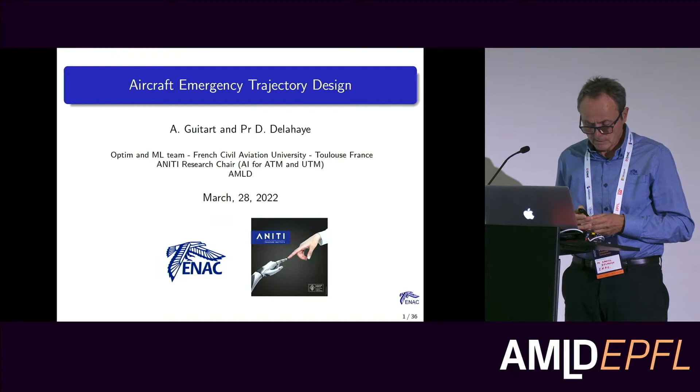So what we would like to address today with you... we started working on this problem quite a long time ago in order to bring a decision support tool to the pilot, in this case, in case of emergency. So I will give just a brief agenda of this talk. I will present the objective of this work. My student, Andrea, will present the resolution algorithms and some results we have developed in this research. And we will address conclusion and perspective.

One thing we have to mention, sorry, I have to be close to the mic.

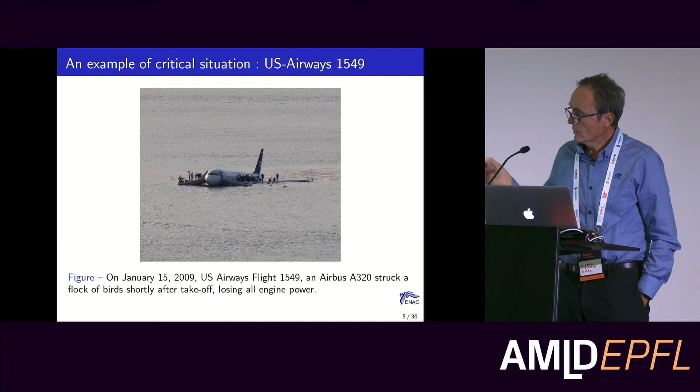You remember this crash in 2009. It is a very famous event because there is a happy end. Due to bird strikes, the aircraft lost both engines. You know this story. And in fact, the aircraft, just a minute, I try to see if I can, yes, here. So it took off from LaGuardia, the bird strike was here, and as you know, the aircraft glided to the Hudson River. But if you see the timestamps here, at that time, about 15:27, and they reached the water at 15:31. So roughly we have 3 minutes gliding.

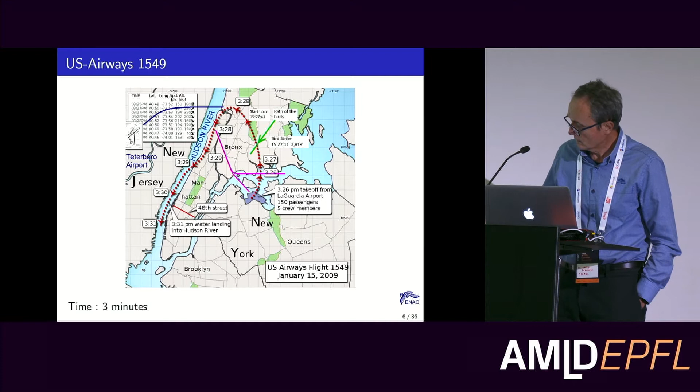So in this case, we were working on this crash with Georgia Tech with Panos Tsiotras in 2009. The idea was already to propose alternates to the pilot in case of emergency. The pilot could say, I accept or refuse, but the system is able to propose something. So that is the real purpose of this work. This one is the most critical one because you are close to the ground and you have very short time for proposing something to the pilot.

I give you also two other cases. The Air Transat flight 236 in 2001, Toronto-Lisbon. Due to a fuel leak, the aircraft ran out of fuel, so it glided for 120 kilometers, 21 minutes, so it was much higher, before reaching the Azores island. This one also, we were working on this crash with Georgia Tech: the Swissair flight from JFK to Geneva, due to fire on board in 1998. The pilot was unable to reach Halifax. But in this case, you have 14 minutes from the event to the ground.

Just to remember, over 70% of fatal aviation accidents are in the takeoff and landing phase because you are close to the terrain. In some areas where you have mountains, it is even more critical. You have to take into account weather. So thunderstorms, for instance: when you have an event like the previous one, you have to be able to reach the ground, avoiding the mountain and also avoiding the weather.

And you have to take into account the wind, because depending on the direction of the wind and the direction of your heading and the landing site you select, you may be able to reach or not this landing site.

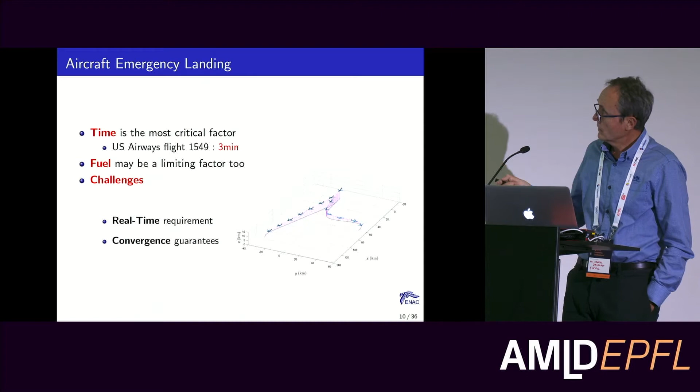You are an aircraft here, you have different landing sites, which are proposed by another algorithm in the project, and we have to produce safe trajectories to bring back the aircraft to the ground safely. We can address that with a classical optimal control approach, but in this case it is too long. The right approach is to produce these trajectories in two phases.

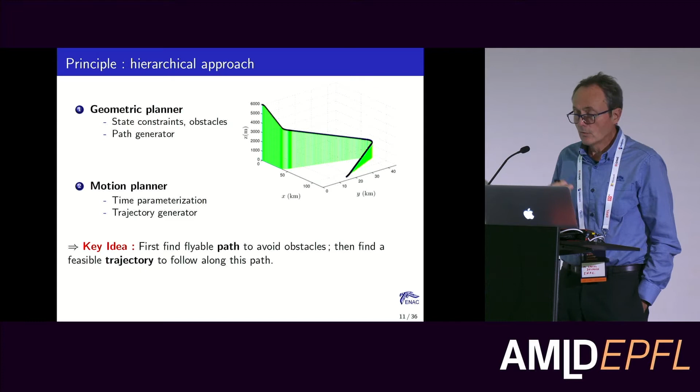The first phase is what we call the geometric planner, which is what we have mainly designed. So we try to design the 3D path. When you have designed this 3D path, you do the time parameterization, which is called the motion planner. Doing that in two phases is much more efficient in terms of computation. So the key idea is first find a flyable path to avoid obstacles, weather, and things like that. Then find the flyable trajectories with the time to follow along this path.

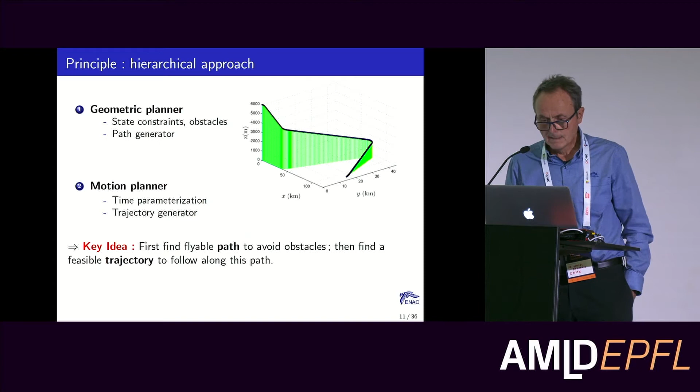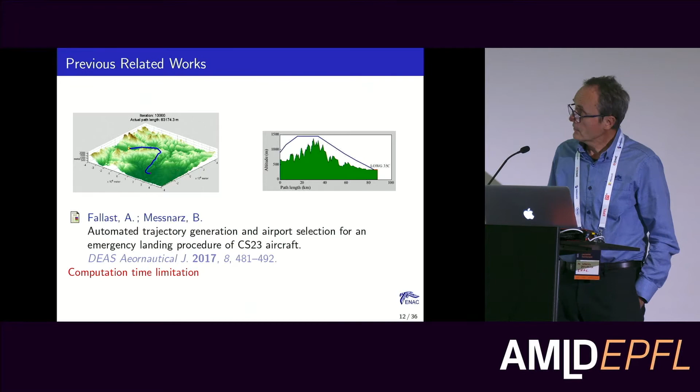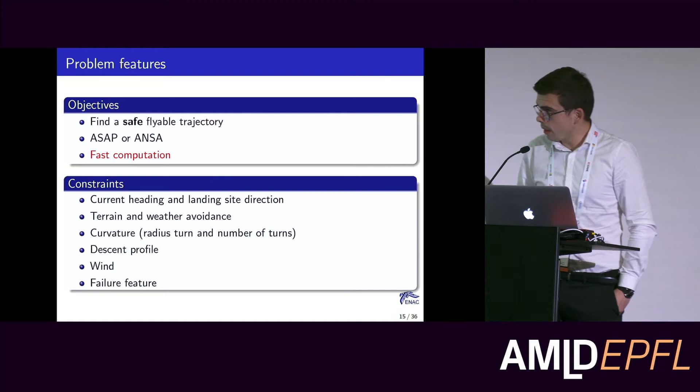Depending on the type of emergency, the curvature and the descent profile can be very different. For example, in case of dual engine failure, the aircraft has to descend to keep a sufficient speed to avoid stalling. So we have to take into account the descent profile and the curvature, mainly defined by the turn radius and the number of turns. And the final constraint is the wind, so we have to take this into account.

So we want to have a very efficient algorithm to generate the trajectories. We decided to use the algorithm called Rapidly Exploring Random Tree. It is a sampling-based path planning algorithm.

At each iteration, a new random point is generated in the space, and if a connection is possible, you create an edge. A connection is possible if there is no obstacle between the two points. At the end, you can connect the final point, for us the landing site, to the graph and generate the path. The main problem of this type of algorithm is that the computed path is not flyable, because you can create discontinuities of heading.

To solve this problem, we decided to connect each point by a single turn curve composed of a first turn to the right or to the left, and then a straight line. Phi is the angle of turn, and L the length of the straight line.

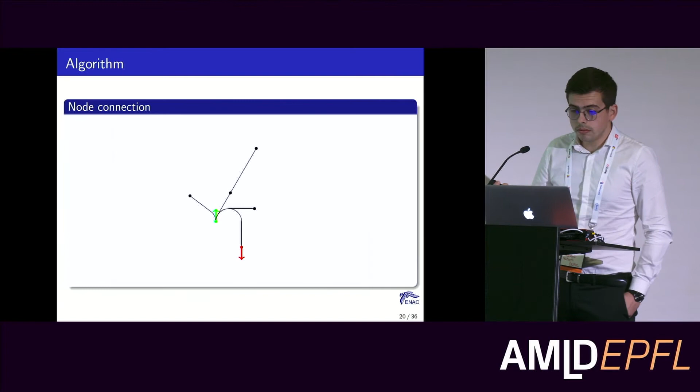We repeat this procedure for each iteration, and at the end, we have a graph of curves. Finally, we can connect the final approach point to the graph, and we have the trajectory.

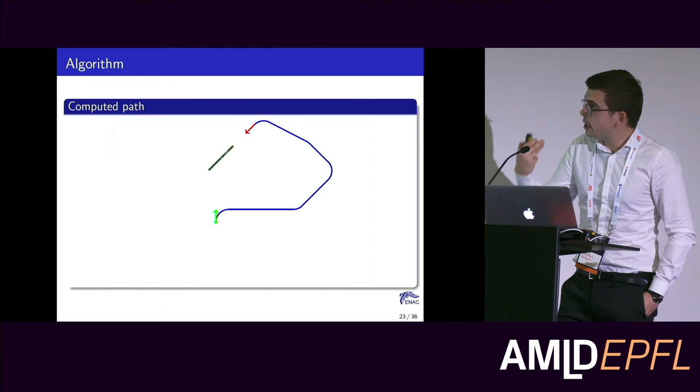Now I will give you the objective function of our algorithm. We decided to minimize the curvature of the trajectory, because in case of emergency, we want to limit the number of maneuvers, and so limit the turns of the aircraft. For a trajectory composed of n curves, we define phi_i the turn angle of the curve C_i, and we decide to minimize the sum of the exponential of each turn angle of the trajectory.

For example, there are two trajectories, and we prefer the green trajectory because there is only one turn, whereas the red curve is composed of many turns. So we penalize this type of trajectory.

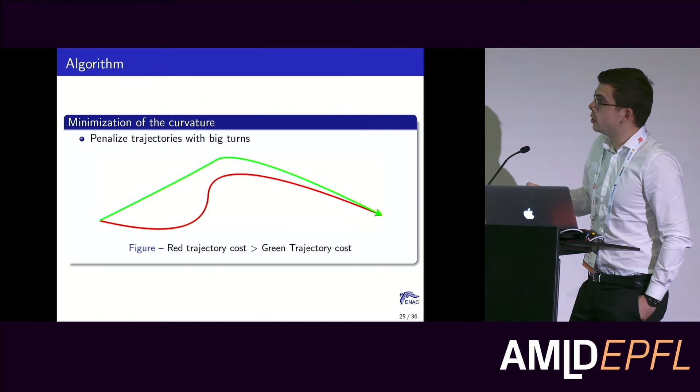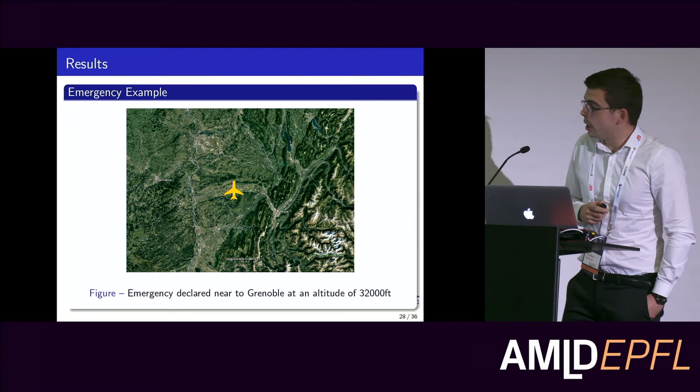Now some results of our algorithm. We tested our algorithm with an Airbus A320 with an emergency declared near Grenoble in France, because it's a very interesting case with many mountainous obstacles, and we tested two different cases, ASAP emergency and ANSA emergency. The emergency is declared near Grenoble at an altitude of 32,000 feet.

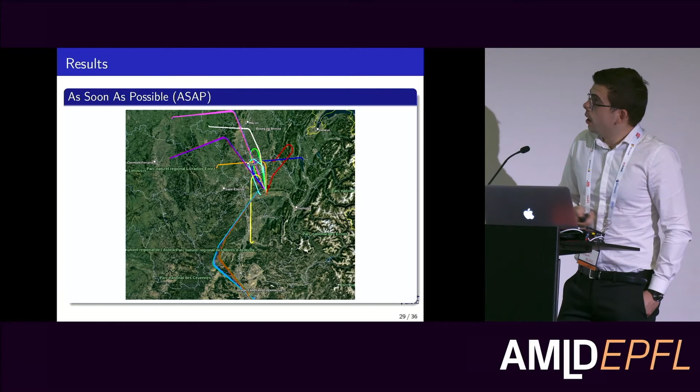For an ASAP emergency, our algorithm generates 11 different trajectories from the emergency position to the landing site. The landing site selector generates landing sites near the aircraft position because we are in an ASAP emergency. In the vertical profile of one of these trajectories, you can see that there is a very fast descent to reach the Grenoble airport.

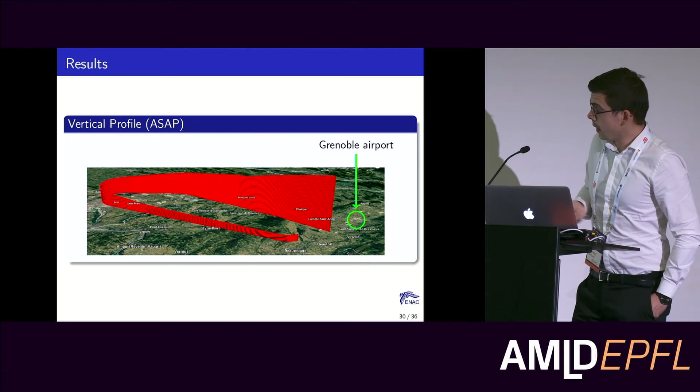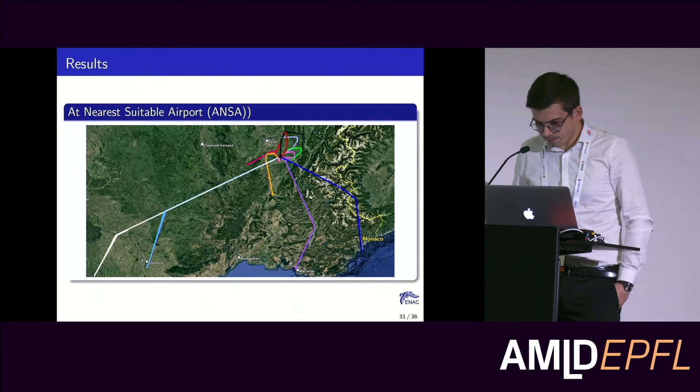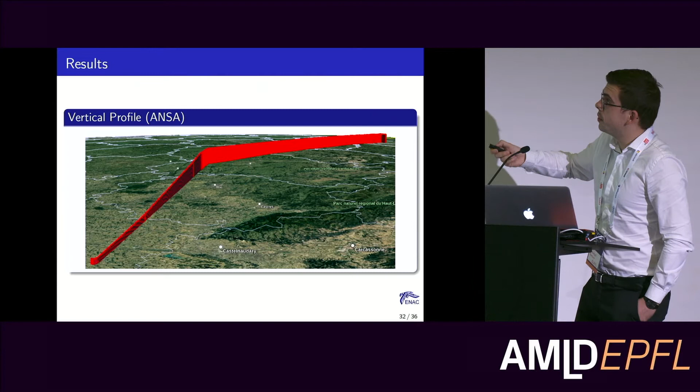In the case of ANSA emergency, the landing site selector generates landing sites near the aircraft position, but also airports very far from the aircraft position, because we have time to land. For example, we generate a landing site at Marseille or Toulouse. In this case, we generate 11 different trajectories. This is the profile of the trajectory from the aircraft position to the Toulouse airport. We can see a very long cruise phase and then the descent.

The main objective is to have a very efficient algorithm. Our algorithm generates 10 trajectories in 10 seconds for an ASAP situation, and in 15 seconds for an ANSA situation. This difference of computing time can be explained by the fact that for very far airports, we have to define a specific tree, RRT, and that can increase the computing time.

Just to complete what Andrea mentioned: why did we decide to minimize the number of turns? It is a recommendation from an airline pilot who is in the project with us, because at the beginning we didn't include it.

So just to conclude, as you can see, emergency is a huge issue. We want to reduce the workload for the pilot, so we need new DST for this kind of situation. I think in the future we'll need new assistance for the pilot, mainly for SPO. We propose an efficient algorithm.

So roughly for one trajectory, we compute this trajectory in 1 second. So quite efficient. And so it has been extended with a landing site selector. So for instance, on the way of the aircraft, we have a landing site selector.

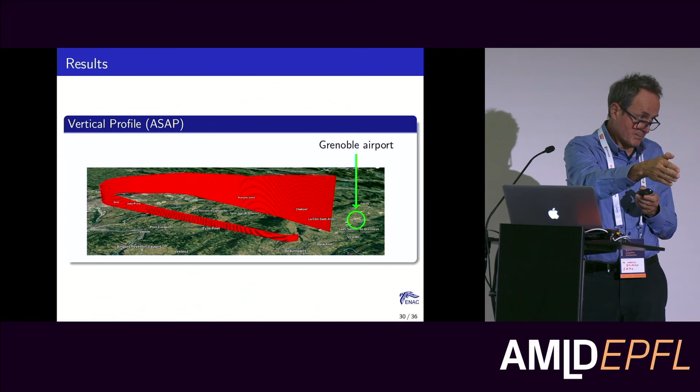In the motion planner that you mentioned before, is the weather also coming in there, or where is that coming in? Yes, so for instance, if we consider this curve, at the beginning the path generator already takes into account these things. Depending on the wind, for instance, if I have headwind, I may have issues to land in a given place. If you have tailwind, this is different. So we take this into account in the path generator and in the motion planner too. Okay, yeah.

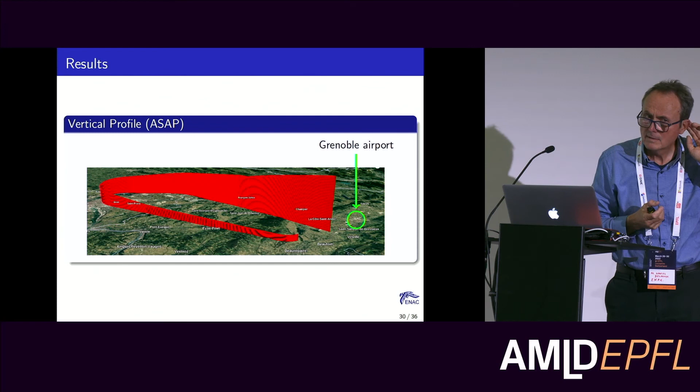An obvious question. What would Captain Sully do with your system? Would he manage to land on the ground? Sorry? In the Hudson River scenario, with this system, would it be possible to land on the ground? For sure, because I already showed you a picture here, this one, which was done in 2012 with Georgia Tech, Panos Tsiotras. It is quite easy to do that after.

But the idea here is there were 4 alternate trajectories. In this case, the landing site is given here, no obstacle. This result, this work here, but you have to be in the cockpit. So I prefer to be careful about that. But it is possible, yes. It is not the only work. I saw recently the movie, and there are many studies. Yes, even at Airbus, but in the movie it is with the Airbus simulator. So anyway.

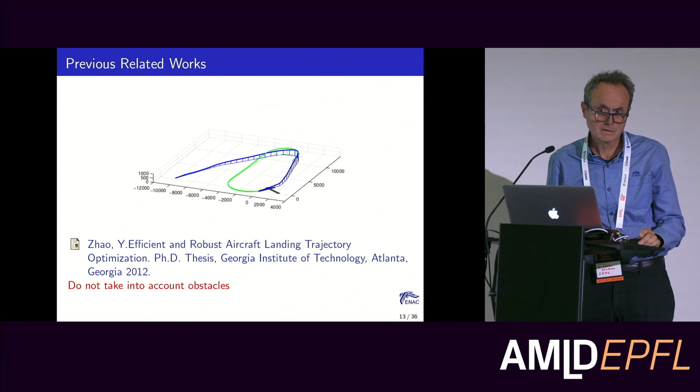Thank you for an interesting talk. My question is actually triggered by her question about losing the engines. As you said, it is calculating all the time the best possible trajectories, and you push a button when there is an emergency. So does it also take into account what kind of emergency you have? Because even the trajectory which takes more time could be safer depending on that.

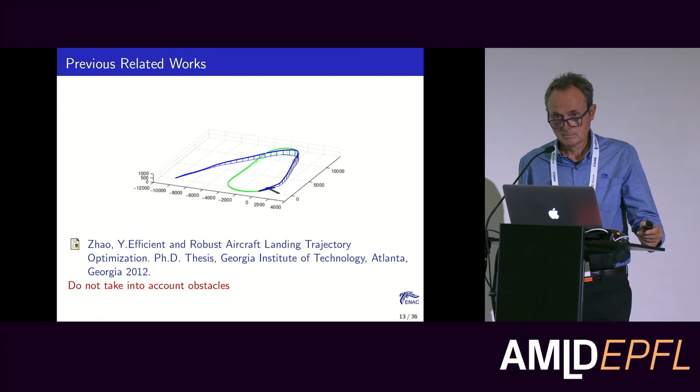So yes, we didn't mention we also have different kinds of emergency. Medical emergency is another emergency for which you have all the capability of the aircraft. You have your engine, but you have to find the nearest airport possible. The worst case is when you have nothing, no engine. But I agree with you, there are some failures, for instance an issue with the rudder. We can't take into account all the possibilities. We have to start with something.

For instance, we mentioned one day the case where the aircraft is only able to turn right for some reason. But we can't plan everything, for sure. We can't predict the future. Just like, for example, your engine has 30% of its capacity as compared to no engine? For us, it is not really an emergency. It is different. We try to tackle this one because it is one of the most critical for the pilot. But I agree, there are other cases not included in this tool. But the pilot is still there. For the UAV, it's different.